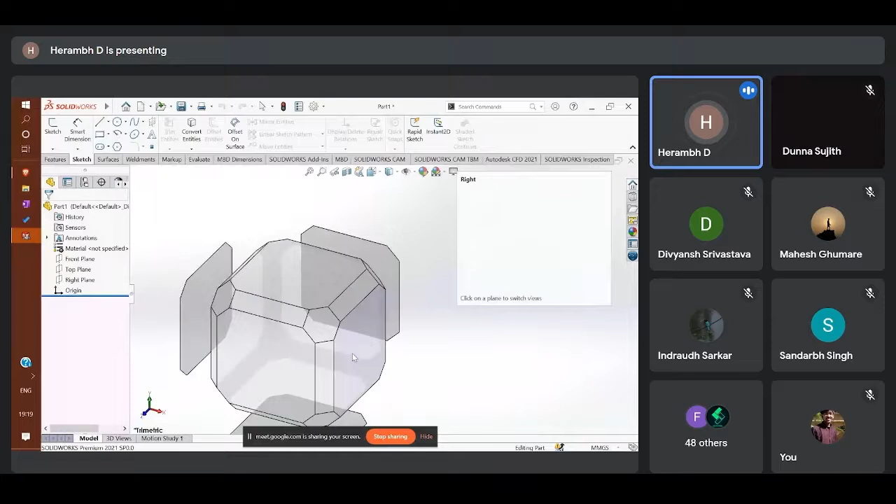So here you can see the various planes and different views, as you've learned in engineering drawing - this is your top view, front view, right view, left view, and so on. On this left side, you have your front plane, top plane, and right plane. You also have your origin, located at the center, which is the intersection point of all three planes.

You also have an option for material - after you make your part, you can specify what particular material it is made of. If you have any annotations to make on the surface or component, you can use this. There are various sensors you can use, and this is your history, which shows the previous parts you had made. So let's start off with the basic tools.

Firstly, when you make any design, let's not talk about CAD, but give more focus to designing and the processes involved. When you're designing, the first thing you do is draw it by hand - you draw it on a 2D plane, imagine it in your head, and draw it on a 2D plane.

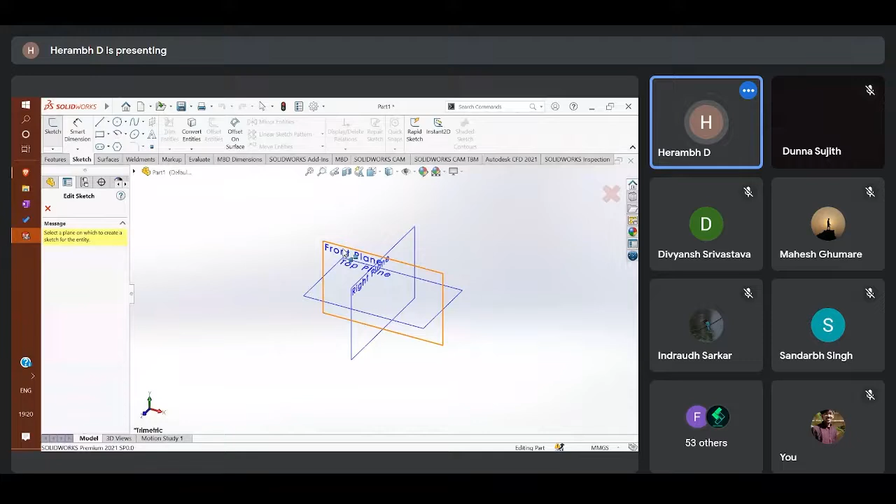So firstly we would do that - we'll select the sketch part and open up a sketch. Here it would prompt you to select the plane on which you want to make your sketch - you have the front plane, the top plane, and the right plane. For now, I'll just click on the top plane, and now you can see it's opened up my sketch. This is the top plane, and anything I make over here would reflect on the top plane.

So here are the basic tools. You have the line tool, similar to what you have in MS Paint and AutoCAD. Using this, you can draw straight lines and then connect them. When you make a closed polygon, make sure it shows a shaded region in the enclosed area.

If this shaded region isn't visible, it means at least one of your sides is open, or there's some mistake. You can also see that here your parameters show up - this is the length of this particular line, highlighted in light blue. I can go ahead and edit that by typing 100, and you can see that automatically reflects over here.

Here are some relations. If I select this particular line as well as this particular line and apply a relation that they are perpendicular, you can see the angle between them becomes perpendicular, and this reflects in the existing relations. There are many other relations you can mix and match between and try on your own.

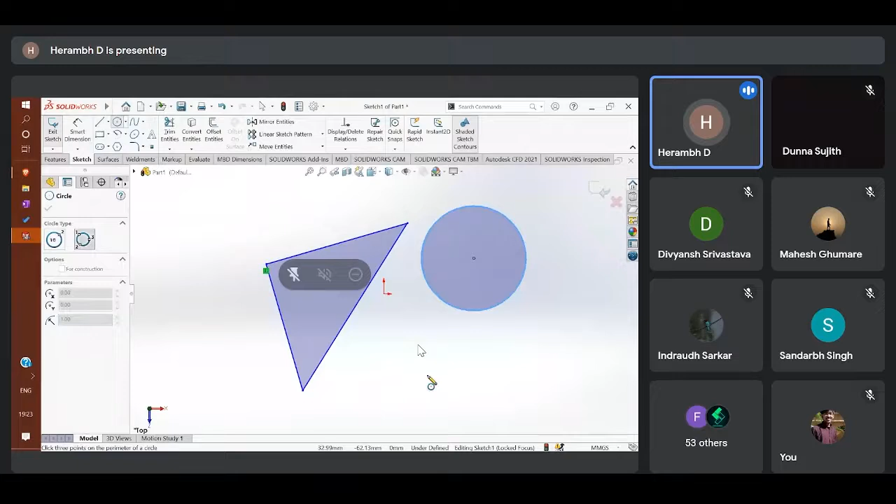Next, we'll move to circle. Circle, as you know, is the same as what you have in Paint. The circle can be drawn using two methods - either you choose the center and then fix the radius, or you can use the 3-point method where you select 3 points, and that forms the basis of your circle.

So is everything okay up to here? Yes, sir. Yes, sir. Yes, sir.

And in case you want to delete this, you can click over here and just slide, drag it, select everyone, and click on delete.

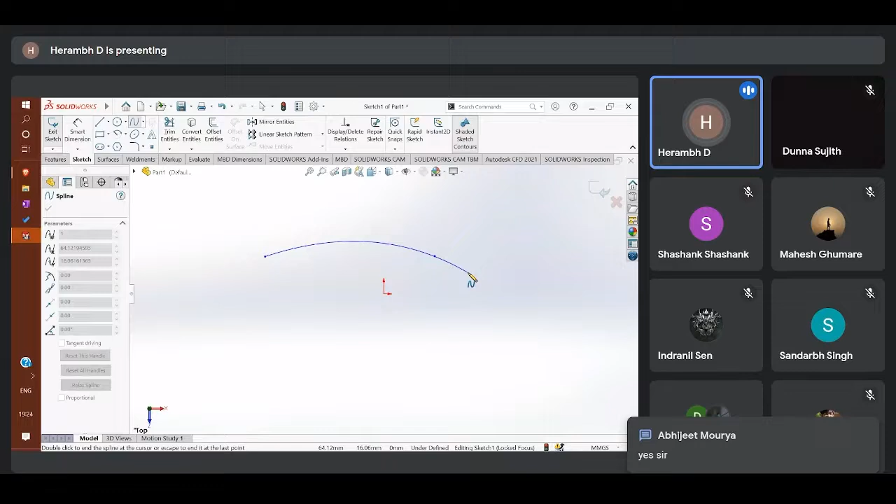Next we have spline. Spline is basically a line tool, but it also allows you to bend the line a bit. You all know that when you design automobiles, you have to consider aerodynamics - curved surfaces in general are more aerodynamically stable compared to hard lines. So this is one application I can think of where we use spline, and there are many other applications, just that I can't remember any other one right now.

Right, so this is the spline. Once you fix this, you can then go ahead and change these to whatever particular shape that you want.

After that, you have the rectangle. Rectangle can be drawn in 5 ways - the first, most simplest way is to select the opposite corners, and that would draw your rectangle. Then you have your arc. While drawing your arc, you have your center and then 2 points - that's the most simple way you can draw an arc. Once you've drawn your arc, you can also go to these parameters and change the various parameters, then choose whichever particular one you want.

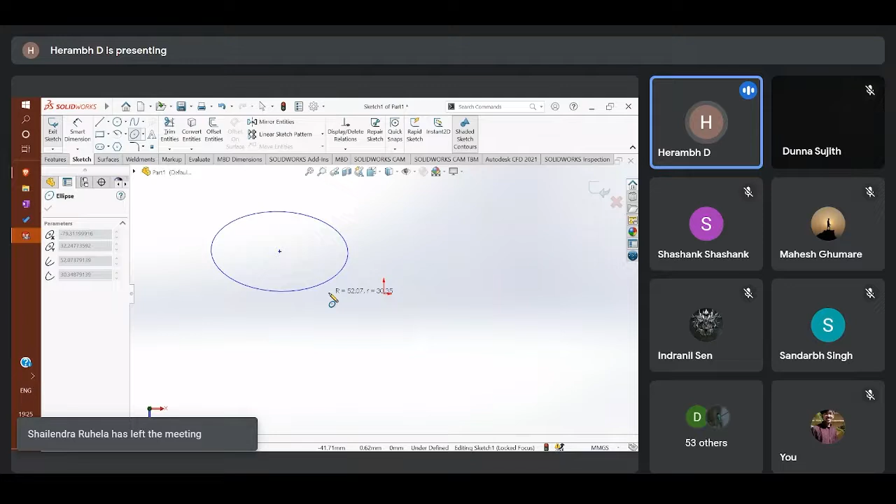Then you have the ellipse. As you know, an ellipse is slightly compressed on one side and elongated on the other. Using this, you can set your longitudinal axis length and then your lateral axis length.

Here you can add any text if required. Here you have a straight slot option, which looks somewhat like this - that's how the straight slot looks. And here you have some other curved slots that you can draw.

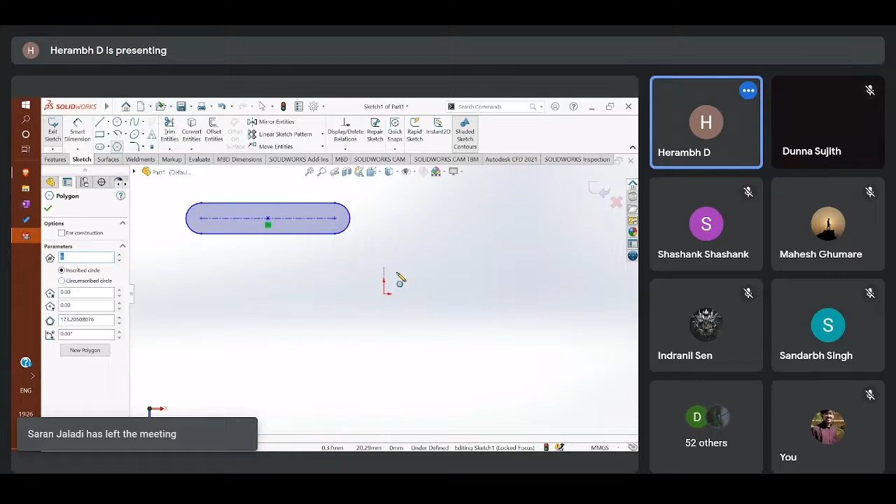Here you have the polygon option. You can select the number of sides that you want, then choose an inscribed circle or a circumscribed circle, and draw the particular polygon that you want.

After that, here's your sketch fillet. So let's say you're drawing a rectangle, and you can notice that the corners here are hard lines - they intersect at 90 degrees. If you don't want a sharp angle and want rounded edges instead, you can go to your fillet, select your corners, and then specify the radius required.

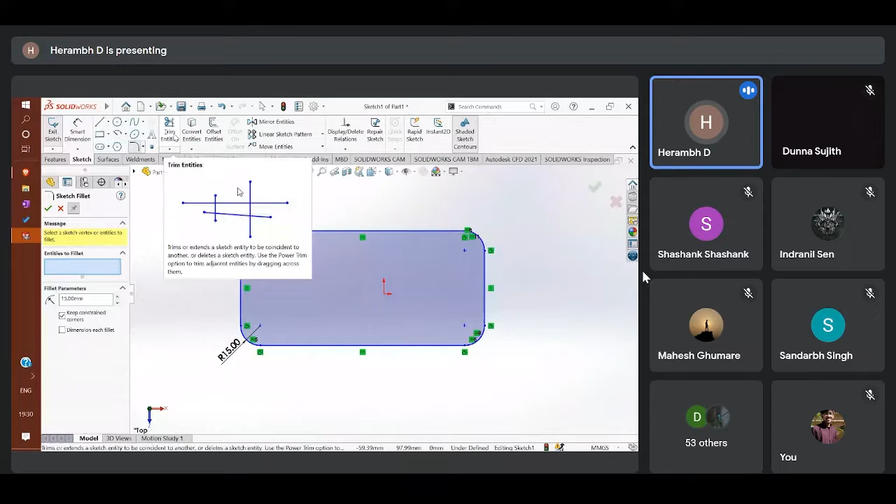Moving on to trim entities, as soon as I click on trim entities, it shows me the power trim option. What the power trim option helps me do is cut between any two given points - I just draw a line passing through that particular object and it removes it. You can see I have two points and this is the line between them, and as soon as I drag my mouse through it, it removes it. That's what the power trim tool does.

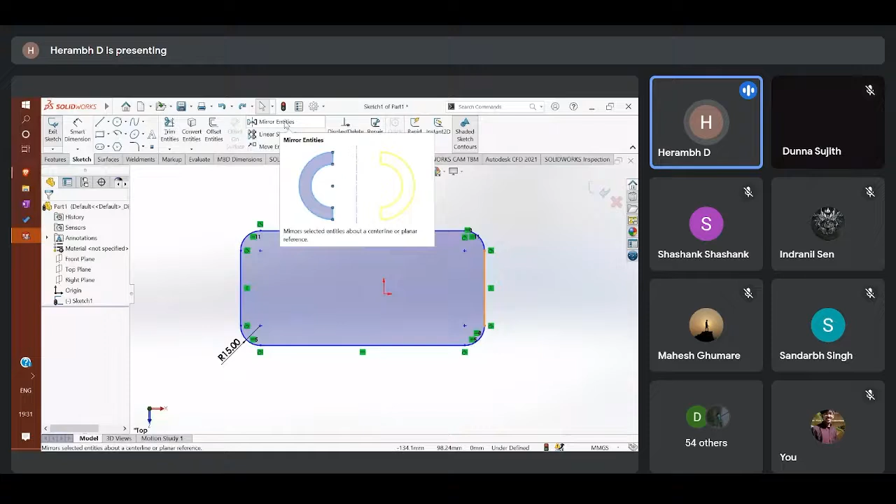You can also offset entities, mirror entities, linear sketch pattern, move entities, and so on. I'll be talking about mirror entities and linear sketch pattern further.

Let's draw a small circle over here to talk about the linear sketch pattern. It makes a linear sketch - a recurring sketch in a linear direction. This is my direction, that is my x-axis, and this is the distance. If I increase that distance, you can see it increases. Say I do 20 millimeter - this is how much my distance would be. And if I increase this to say 10, I would obtain so many circles.

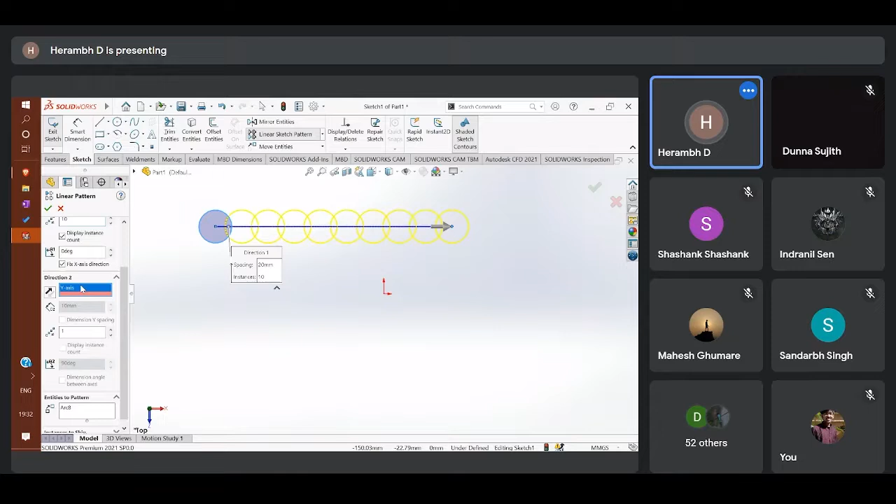Now going to direction 2, this is my y-axis. If I increase this, say to 5, you can see I obtain a matrix of this whole thing. If I make this one instead of 5, you'd see this again becomes a linear pattern. You can play around with this as per your application and make the suitable choice.

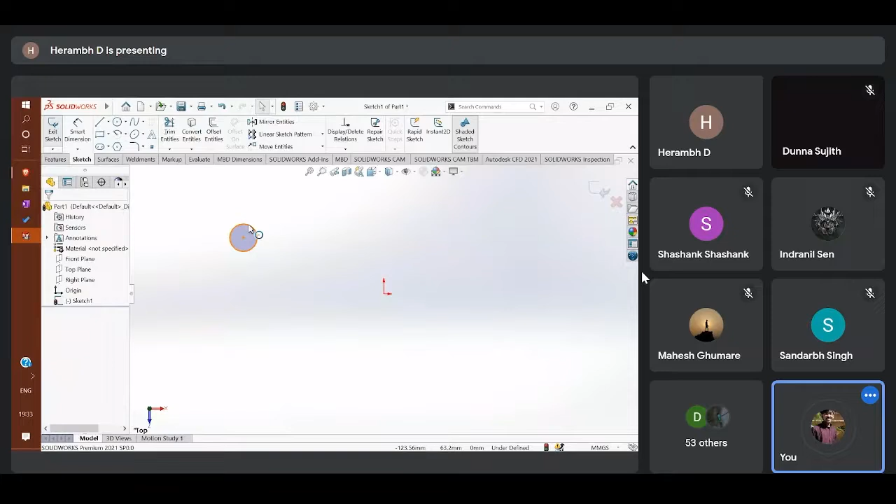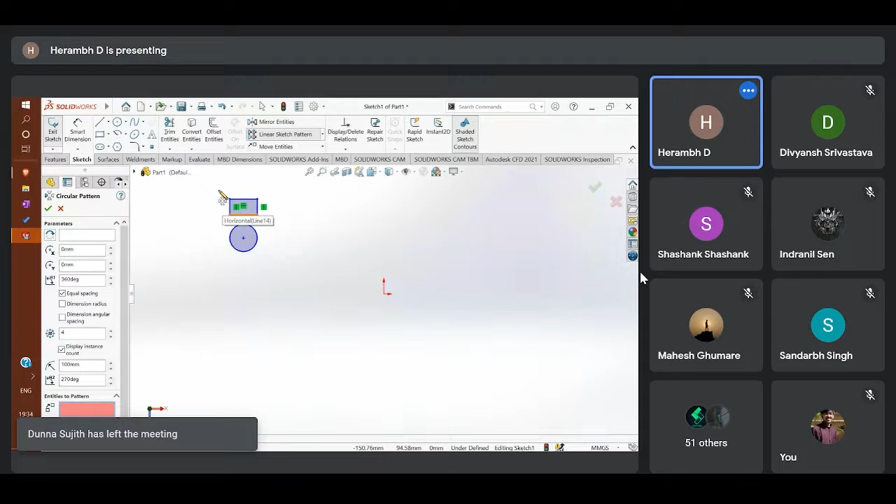When you click on the linear sketch pattern dropdown option, you also have a circular sketch pattern. In your circular sketch pattern, you have something called entities to pattern - the particular object that you want to make a pattern with - and the other object is the circle that you want your pattern to be around.

I go ahead and select my object that I want to be patterned, and this is my point - the point around which I want my pattern. I can increase the radius so that my pattern forms around it, and that's about it. That would result in the formation of a pattern in this manner.

Okay, so say I've made all these entities. Now I want to move this particular rectangle over here, or say over here. This is want to move this rectangle, right?

So I go ahead, click on move entities, and I select this particular one. And you have the parameter from to. So my start point is the center of this. Okay, let's say I move it from this corner, and then I move this, right?

Okay, can anyone tell me why all my rectangles moved? And can anyone also tell me what was the particular feature that you noticed when all these rectangles moved?

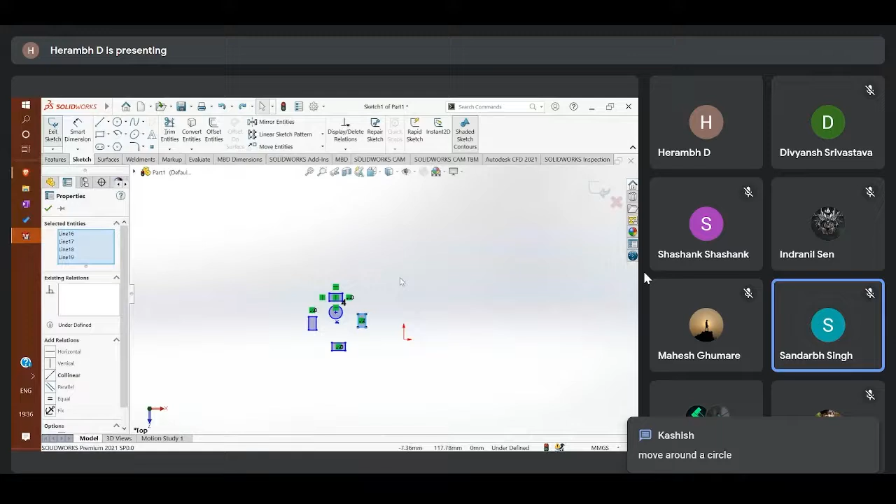So can you please repeat this part? This particular part. Oh yes sir. From where? Like from circular sketch pattern, is it? So how those rectangles moved away from the circle, that part.

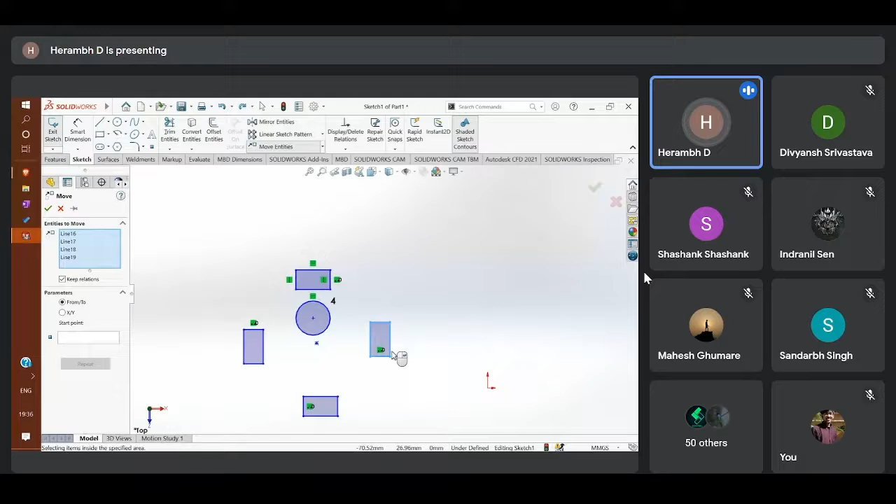Okay, so I click on move entities, right? And then I go ahead and select the particular object that I want to move. After that, you can see that in the parameter section, I have ticked the from and the to. So I then have to specify my start point.

So say I specify this as my start point, and then as I move my cursor, this is the distance by which I want to move this, right? So you can notice that all my rectangles start moving as soon as I move this. So can anyone tell me why this is happening?

Okay. Oh, okay. Okay. Right.

Okay, so in a way this is right, but not completely right. My objective was to move this particular rectangle only, right? This was the only one that I selected. So ideally, what should have happened was that when I move this particular rectangle, only this should have moved. Why did the others move?

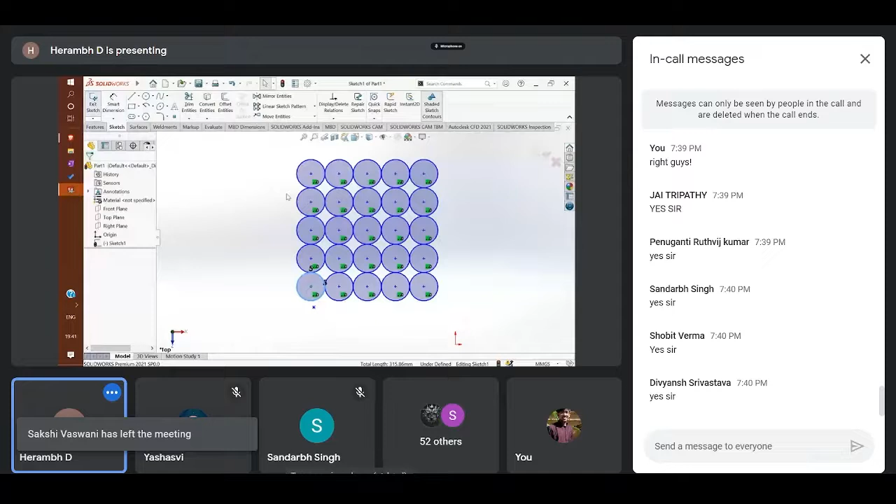Right, so let me go ahead. This is my sketch, okay? And I'll be exiting my sketch now, and I'll be moving to features, okay? So in the features, these are the various types of features that you have.

And for this particular example, I'll show you just a second. Okay, so I'll show you what happens when you use extruded base. Okay, so I'll go ahead and select all my circles.

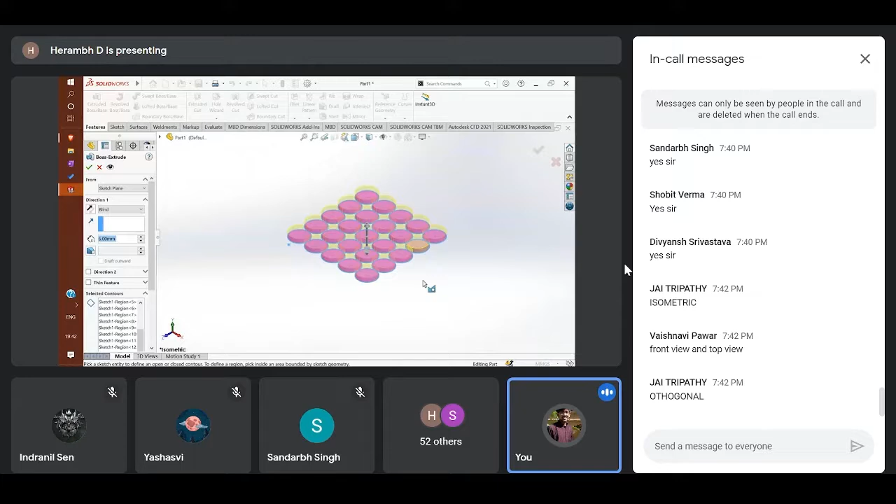Sir, this is the isometric projection. Earlier one was the top view. The earlier was the front view and this is the top view. Yeah, what's the exact?

So you notice that I selected on extruded boss base, right? So let me first tell you what extrude means, so that would help you understand what I'm doing here. So extrude basically means to push a plane from one point to another point in the same direction, right? That's what we're doing here.

So when you extend a surface or a plane in a linear manner, it is known as extrusion. And this extruded boss base is what I mean. It's the same thing, and it helps us achieve the same thing. So let me do that again for you.

I'll go ahead and select all. Just a second. Yeah, so I go ahead, click on my extruded boss base, and I select all these, right?

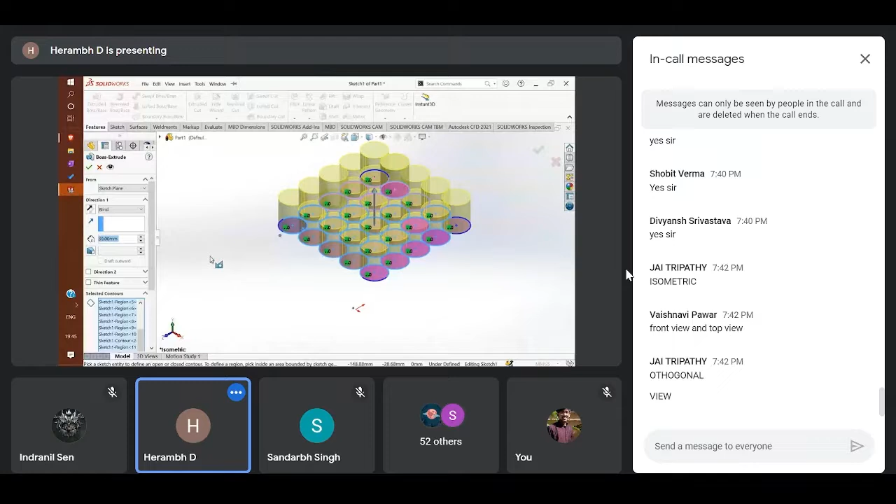As I'm selecting these circles, there's a predefined value of this length that's specified that causes this extension, and it gives us a preview. This yellow thing you can see here is the preview of how it would look if we did continue with the extruded boss base. So the one over here is the direction, and over here you can toggle with the length and stuff. Let's keep it at 30, and just like that, 25 cells of my battery pack have been made.

You can also see that it's a very simple process. It didn't take me anything, it was very effortless. I didn't have to measure each single one and then place them separately. So this is why this is the strength of SolidWorks, and this is why we chose, and many other companies at the international level choose SolidWorks over other software.

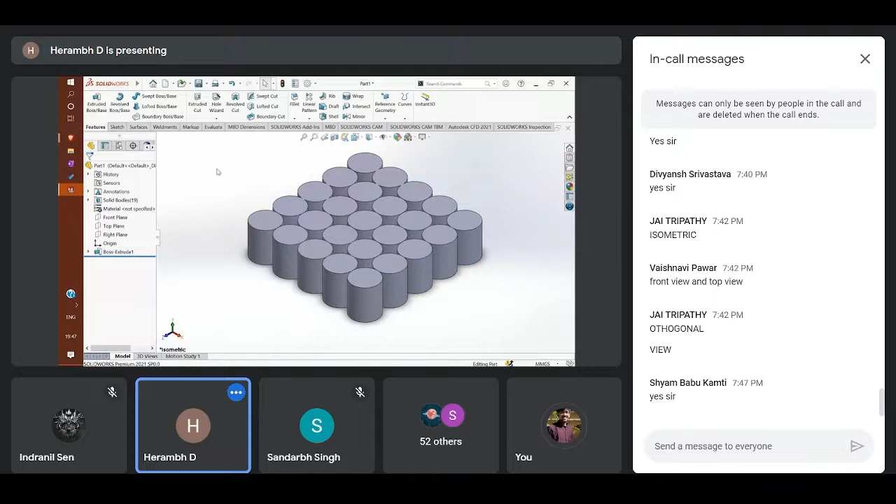Unmute and let me know if you got it, because I can't look at the chat right now. A toroid, yeah, a toroid, right? So that would be...

Okay, repeat - what I was saying is I have this circle, and let me take the top view. Now I have various circles. Let's say I'm just selecting this particular circle, and I draw an axis passing perpendicular to it, along the y direction or the x direction in this case. I draw an axis in this direction, and this circle is located in the zx plane in this case.

Now I want to rotate this circle in the y direction, such that it comes out of the plane and along this axis. That would result in the formation of a toroid, or a somewhat donut kind of shape. Do you all agree? Yes, sir, yes, sir. Okay.

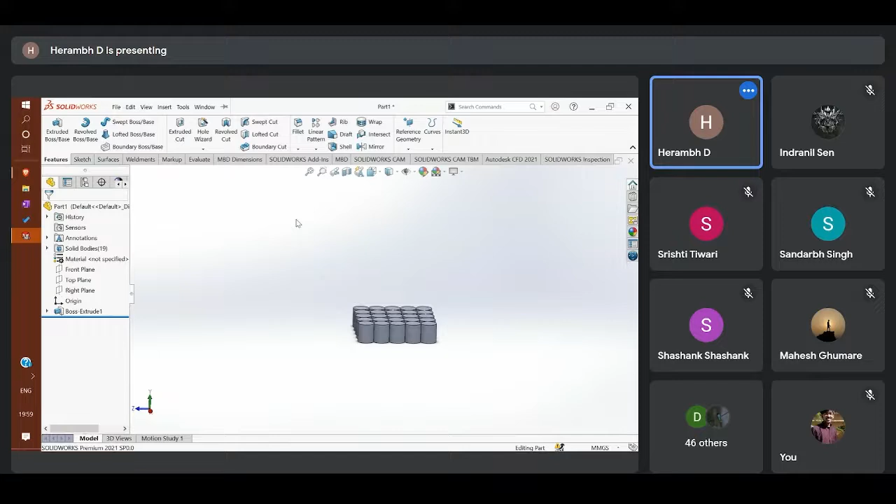Right. Dhruv, can I start? Okay.

So moving on, these were all the ways you could extend a 2D surface. The boss or base were methods you use to add material, right? So now what do you use to remove material? When you want to remove material, you use the extruded cut, the revolved cut, the swept cut, lofted cut, boundary cut, and so on. I'll be using this when I make the part, so I'll skip past this for now.

Next, you also have the fillet, similar to how we had in the 2D. Right? We have the fillet. So let's try the fillet on one of our parts. Let me just figure out this thing.

So I'll go ahead and click on fillet, and then it would ask me for which particular item I want to fillet, and I'll go ahead and select the edge. Make sure you select the edge when you're filleting, not the surface, because that wouldn't be filleted there. And then I'll go ahead and increase my radius, and then click. So this is how it would look if I fillet it. Say this was a rectangular shape or some other shape, only one of the sides would have been filleted. Since this was circular, the whole thing got filleted.

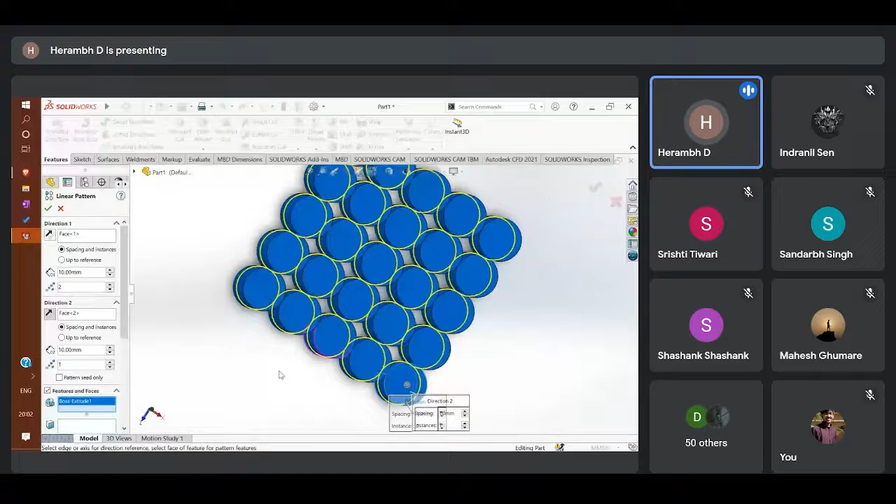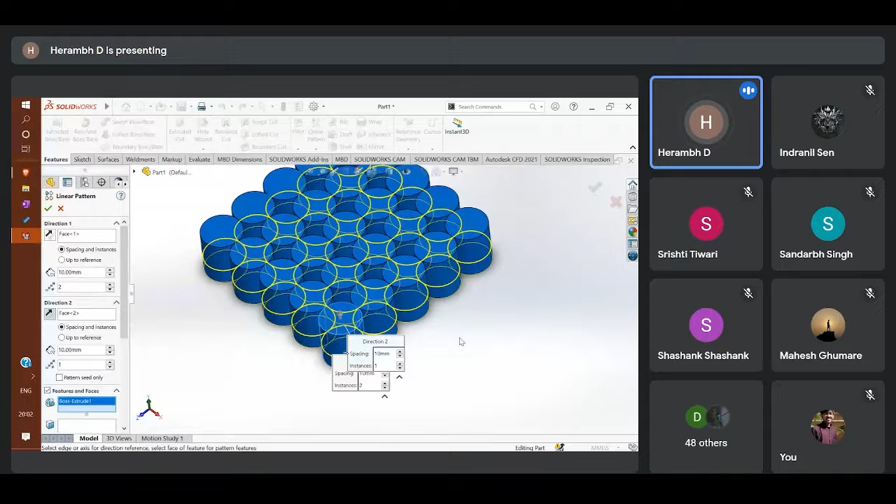Now you can also see that I have the linear pattern. Let's see what happens when I use the linear pattern. Let me select this, I'll select the whole body. So you can see that as soon as I selected this and specified the distances, it resulted in the same thing as what happened when I used the linear pattern in the 2D case. But the benefit of this is that instead of me having to select each individual 2D part and then applying the extruded boss base, in this I would only have to draw one single cylinder, and then this would help me draw the 3D automatically.

So yeah, these are the various things you can do in features. The other parts you can observe, like the draft, is something you can use to taper a particular surface area. Using shell, you select only one particular surface and then shell out the rest of the volume. You also have various other parts. These aren't used that often, but you can explore them. They're always handy, that is why they present such tools.

So let me move on to reference geometry. Reference geometry basically provides me with all these options. I'm about to go ahead and select plane. As soon as I selected my plane, it's asking me for my first reference. So in my first reference, I have to select a particular plane which I want to keep as my reference.

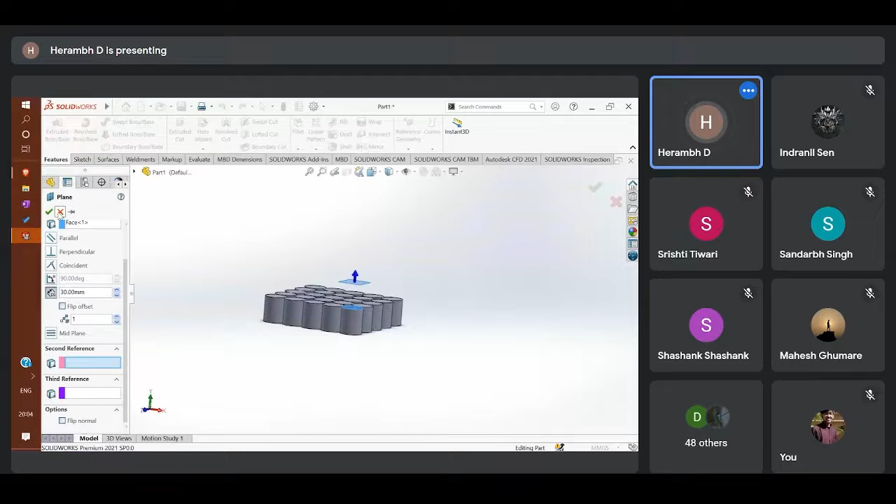And if I hit enter, you can see that a new plane, Plane 1, has been created. This is visible over here as well as over here. You can see that I have a new plane one.

So let me tell you briefly how I can use this new plane to create a totally separate sketch on this plane. Let me take the top view. So when I'm looking from the top view, if I make any changes over here, doesn't it look like my changes are going to reflect on the same plane that we made these circles on?

Can anyone unmute the mic and answer?

Yes sir, it does look like if I make some changes on this plane one, it's going to reflect in the same plane as we made the circle, right? Yes sir. Okay, so I'll show you that that doesn't happen, and this is why we use this reference geometry and this plane. This might not be very helpful in this particular case, but in most other cases it proves to be very handy.

So I'm going to go ahead to sketch, same procedure as what we did in the beginning. Go ahead to sketch, click on sketch. It will ask me to select my plane, but since I already had my plane selected, it didn't ask me. And now I can draw anything I want.

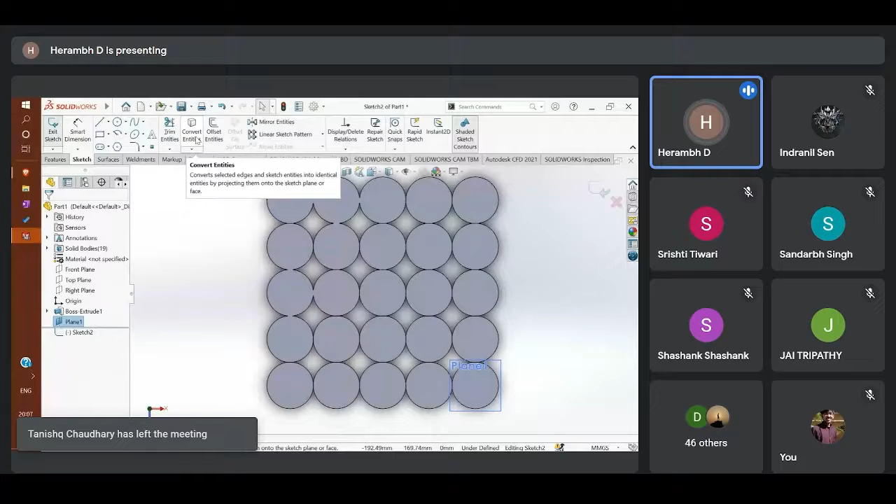So that's what's happening here. I already have my sketch made on the top plane, and now I'm trying to import that sketch, or project that same sketch with the same dimensions and stuff, onto my new plane, which is identical to that plane.

So I'm going to go ahead and click on convert entities, and then I'll click on this circle that I've made. Okay, and then I'll go ahead and click on enter.

So you can see that this arc has been made. When I only selected this particular arc, you can see that now this particular arc has been drawn onto my new plane.

From the top view, it looked as if it was being drawn on the same top plane, but when you look at it from, say, an isometric view or another view, you can see that this new sketch, which has been made using convert entities, has been made onto a new plane.

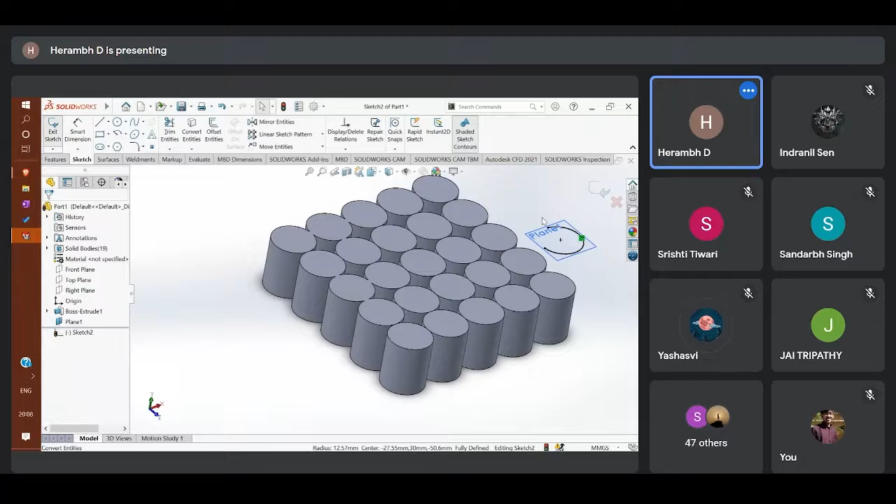Any doubts in this? No sir. Okay, so yeah, this was how convert entities works.

So using reference geometry, I drew my plane. I selected and drew my new plane, and then I went to sketch and sketched on this new plane. And using convert entities, if we want to draw a similar or identical sketch from one plane to another, we want to import the same shape so that we don't mess up with the measurements and stuff. So it comes in very handy.

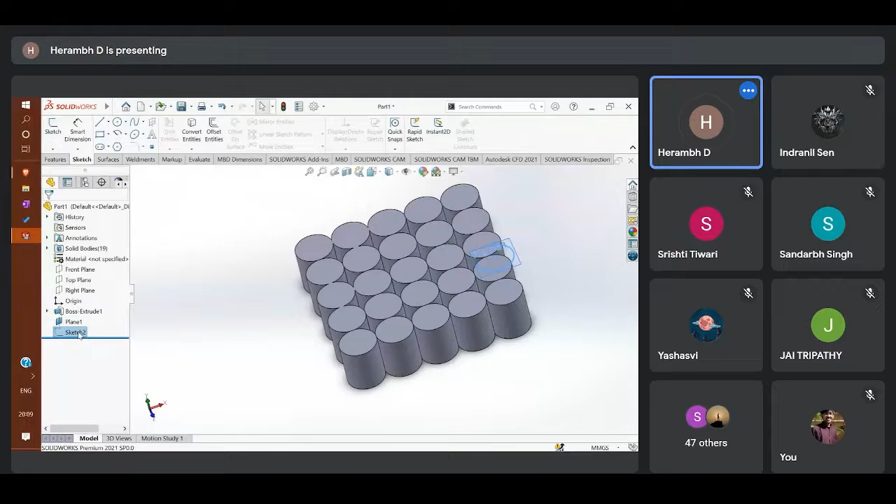So let me exit this sketch, and let me delete this particular sketch and also this particular extrude. Let me start off with a new sketch.

Let me make it on the same top plane. So I'm making a square, sorry, a rectangle. I want to set the dimensions.

So I go ahead to Smart Dimension, click on the line that I want to find out the dimension, and then I set this to 100. Click on this, set this to 200. So now you can see that I've made my rectangle 100 by 200.

I now want to fillet my corners. So these are my corners. This particular fillet radius is very high, so I'll bring it down to 10.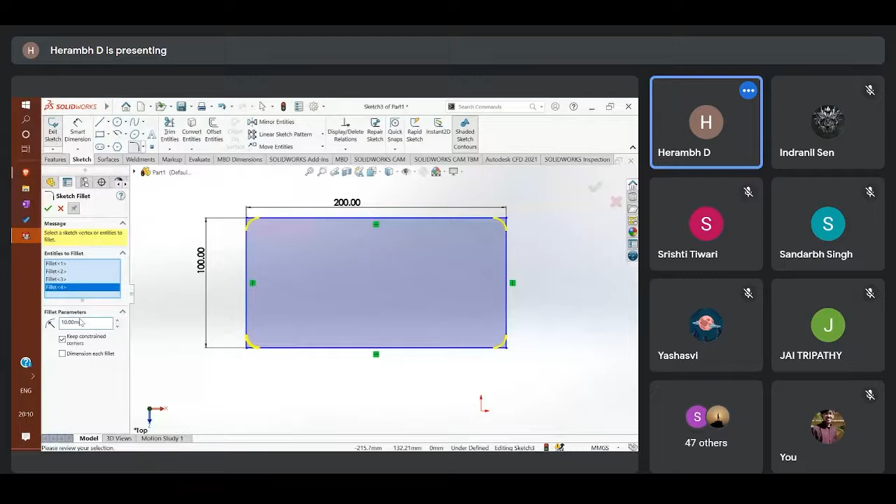So now my filleted rectangle has been made. Now what I want to do is extrude this. I move to feature, exit the sketch, move ahead to boss base, and make it 30 millimeter.

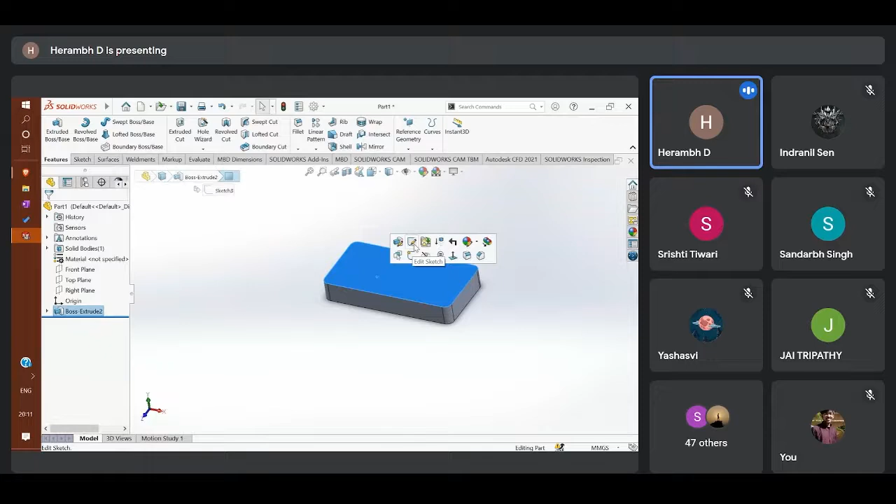This looks somewhat like my mobile phone, right? Okay, so what I'm going to do now is make a sketch on this top surface of this extruded object. I'll select this plane and say that this is the plane on which I want to make my sketch. So I'll go ahead and make a circle here.

I'll make this 20 millimeter in radius. Now I want to bring this to the center. There are many ways you can do this, but I find one particular way very helpful, and that's using smart dimensions. So I'll select on the circle center, and then I also select.

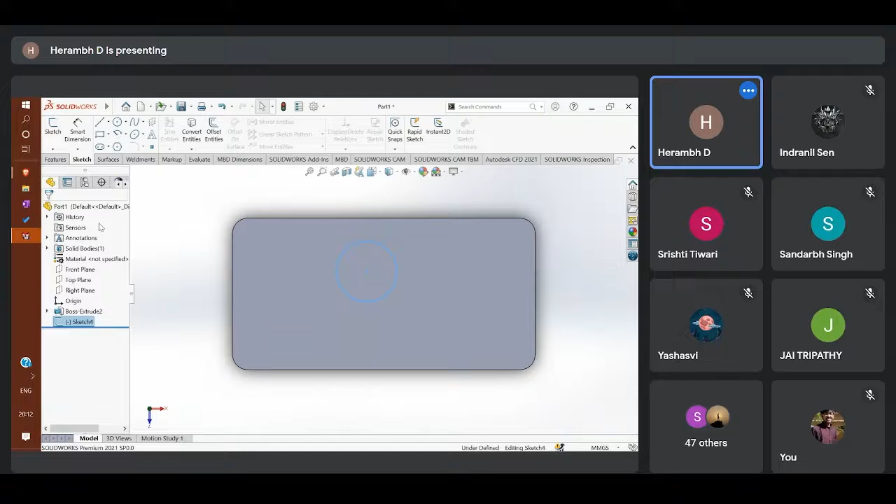I'll use the smart dimensions. Just a second. So now I select on the smart dimension, and I select this line, and I select this particular point.

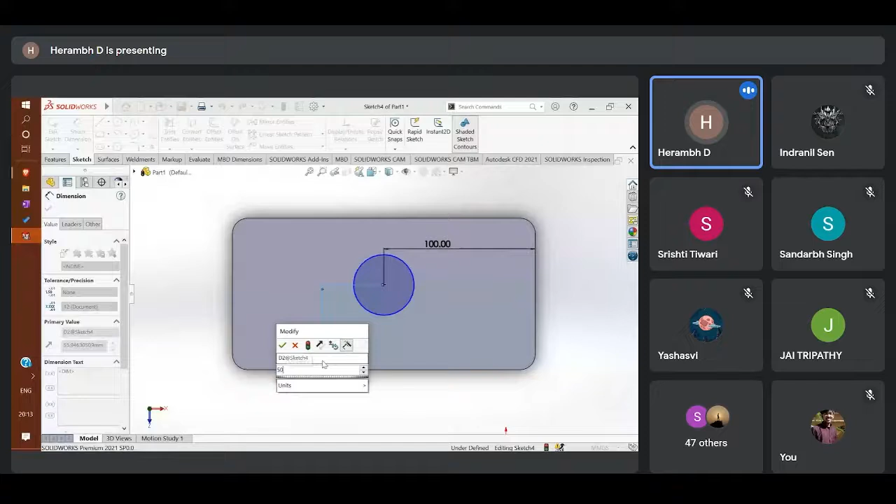So I went to smart dimension, and I found the distance between the center and the line, and I entered this as 100. Now I also find the distance between this point and this point over here - this point, the center, and this particular point - and I want this to be 50, so it's exactly at my center.

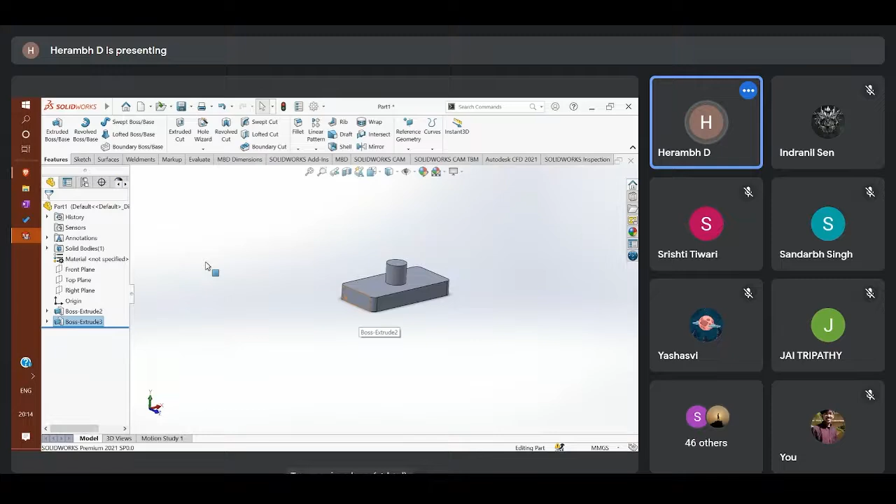After having done this, I move to features, extruded boss base, and enter my distance, say 40 millimeter. So like I taught you how we made a normal extrusion, and then on top of that extrusion, on a new plane, we made another sketch and extruded that as well. Now I'll show you how we use the mirror tool.

So to use the mirror tool, let me first make two circles. Here's one of my circles, this is say 10 millimeter in radius. Now I want to draw another circle over here, which is at the same distance from the center and from the edges as this one. If I was to measure all this and then do it, it would become a very hectic task.

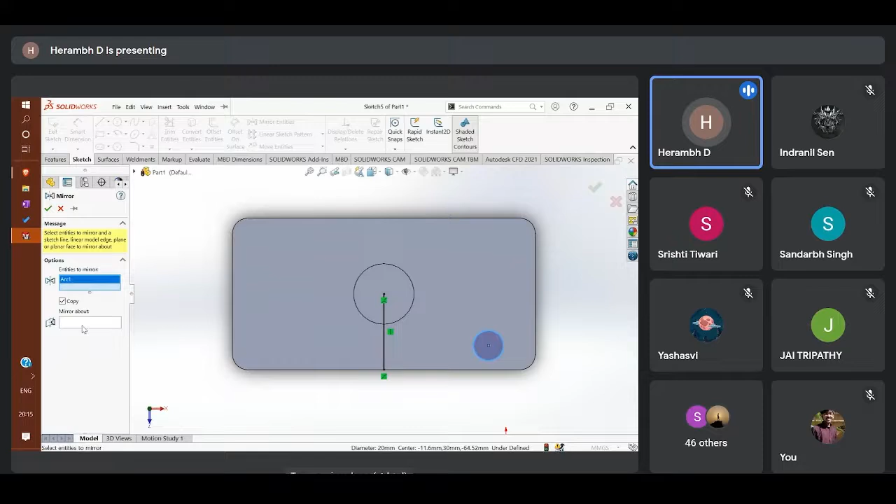So what I'm going to do is just draw the center line of this particular rectangle - this is just for reference. Now I'm going to click on mirror entities, and click on the entity that I want to mirror. Then it also asks me for the mirror about, which is the axis about which I want to mirror my object, so I select that as well.

As soon as I select that, it gives me a prompt and shows me a preview of how my mirroring would look. You can see it's exactly the mirror image of what I had made. I'll go ahead and click enter so my new object is created.

So there are two kinds of mirror entities. One mirror entities occurs in the 2D sketch, and the other occurs in the features. The difference is that when you're mirroring in a 2D sketch, the mirroring occurs with a straight line or some axis as reference, and when you're using mirror entities in a 3D interface, you use a plane as your reference geometry.

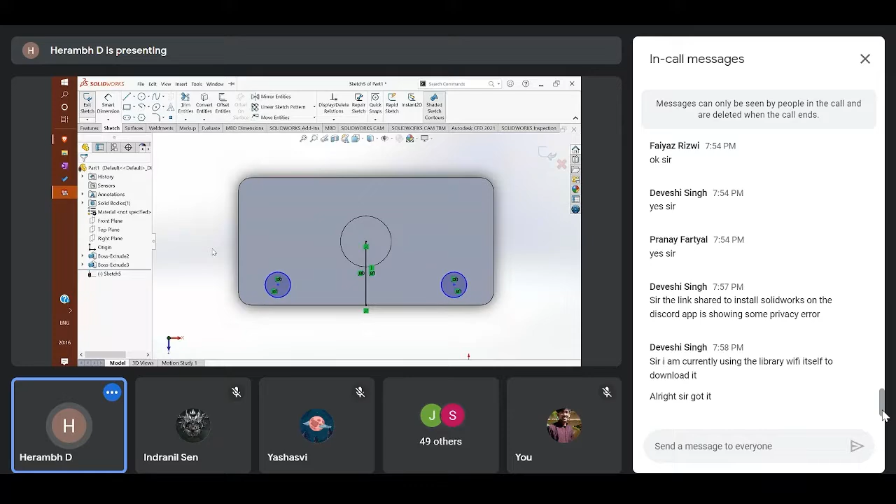So now that my circles have been drawn, I'm going to go to features, click on extruded cut, and select the objects that I want to extrude. So I've selected the two regions. Now instead of blind, I'm going to select through all.

As soon as I click on through all, you can see it cuts through the whole material that had been added. If I clicked on blind, I could adjust the value through which it would cut, but I'm going to click on through all because that's what I want for this particular application. As you can see, when I clicked on through all, the region where I was prompted to enter my distance went away, because that's already predetermined.

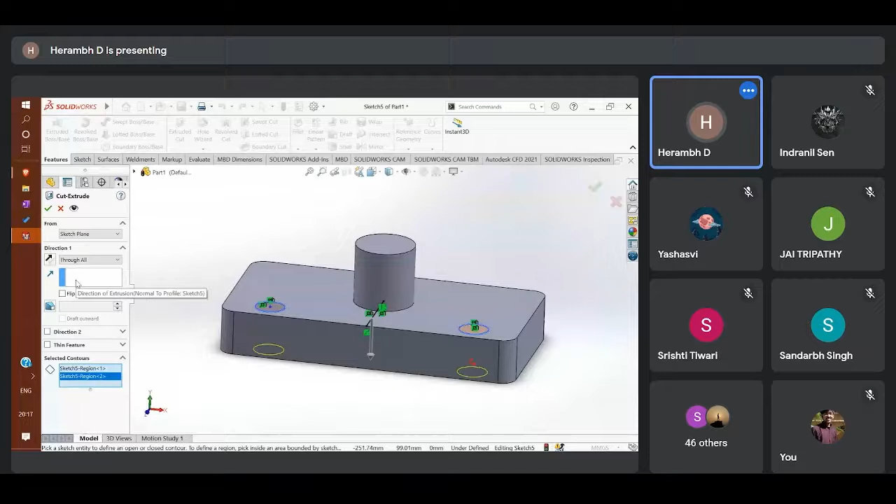So now when I do this, you can see my hole has been made - two holes, and they're exactly identical with respect to the center line. So does anyone have any questions up to here?

Anyone? Can you tell me using your mic? No, sir.

So everything understood, is it? Is there anything in particular that you want me to explain again, or is everything okay?

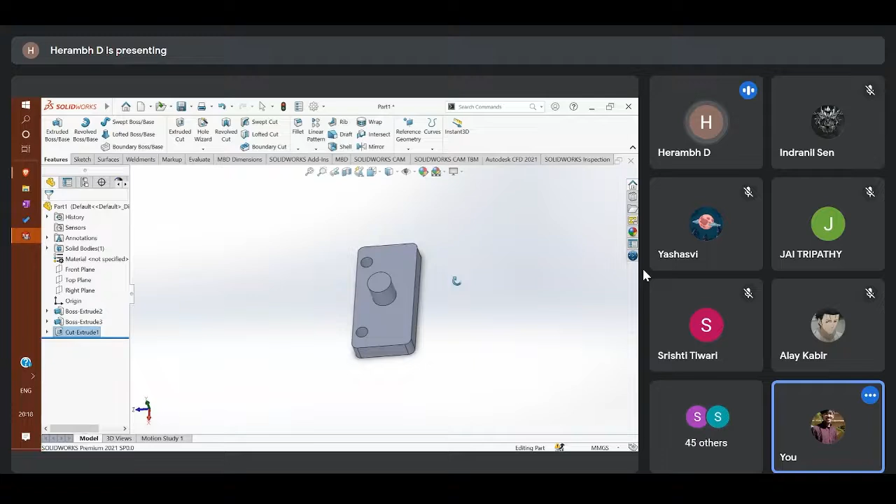One question - can anyone tell me what I could have used? What would have been different if I used blind instead of through all, and did this? What happened? Any guesses?

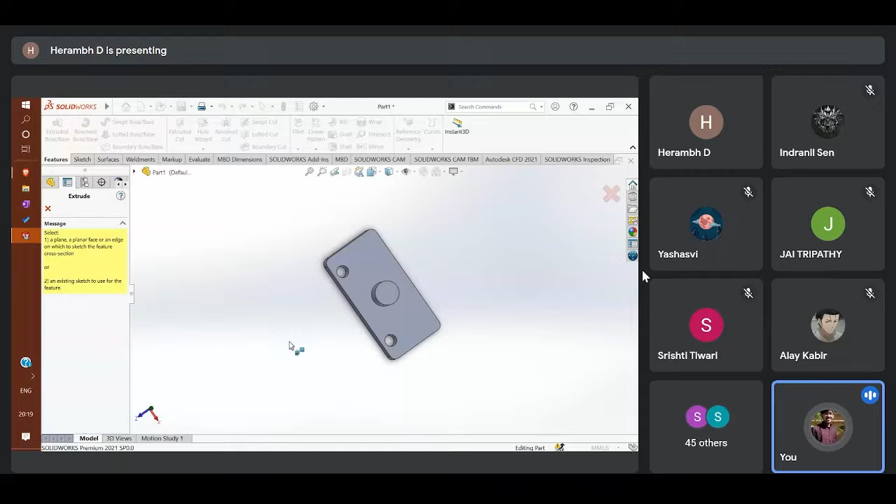Same shape, just like a plastic body, transparent plastic body. And when would this happen? What are you trying - when I use blind instead of through all, you're saying it would look like a plastic body? By blind you mean color, no? Like nothing. Let me redo that once.

I was asking that instead of using through all, if I used blind, what would happen? So maybe that portion would be hollow. It will be covered by both sides, but it will be hollow from the part that you had the distance in mind. Right, yes sir, exactly.

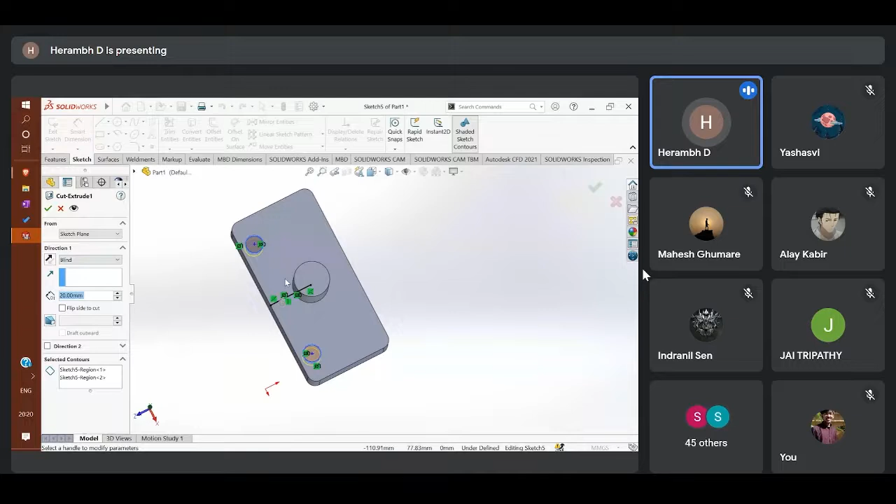So what happens when I use blind is that I can set the offset distance. You can see that from this view. Let me show you in a proper way. It's asking me for the distance by which I want to do my cut - that wasn't possible with through all. What happens in through all is that the hole would extend through all the material present, but that's not the case with blind.

There's another interesting feature you can use - I can use the draft, and then set the degree by which this is to be made. So draft outward, and then I can increase this, right? So what would happen in this case?

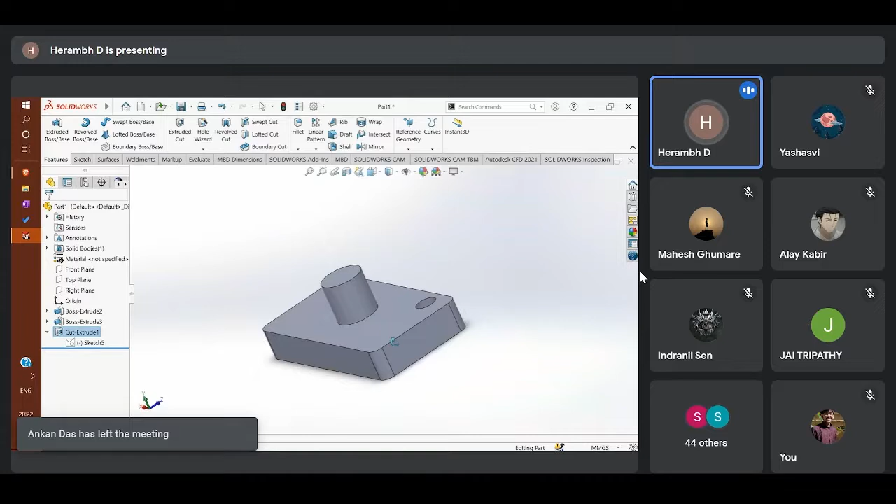A frustum-like structure will be formed. Right, absolutely correct. So this distance - yeah, this is exactly how it would look. You would have a different cross section on the bottom and a different cross section on the top. So this is what happens when I use the draft. Okay.

Okay, let's undo that. So this is my first part. I'll go ahead and save that as part one. I'll now open up a new part.

So I'll quickly go ahead to sketch, select the top plane. I'll make a cylinder. Does anyone remember what the dimensions of that cut was? Can anyone tell me?

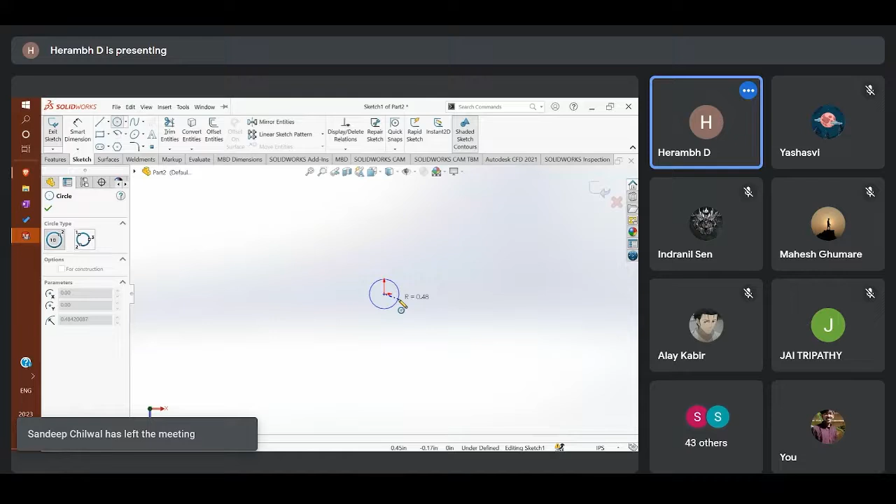Okay, so I had used a 10 millimeter radius for that cut, and as you can see here, this is only 0.5 - it's saying that my radius is only 0.5, but still you can see that it looks almost the same as the circle that I had drawn previously, right? So why is this happening?

You can see that at the bottom over here, there is an option where you can edit your units. So this currently is being drawn in inches, pound, and second, and I had drawn the previous one in millimeter, gram, and second. Right, so this is what made that difference.

This can prove to be very fatal because once you make one particular drawing in a particular set of dimensions, and then you try to make another part in another set of dimensions, you may not be able to make the assembly of those parts together. So be cautious about this - as soon as you start your sketch, make sure you are starting off with say millimeter, gram, second, or meter or inch as per your requirement, and then you make your sketch.

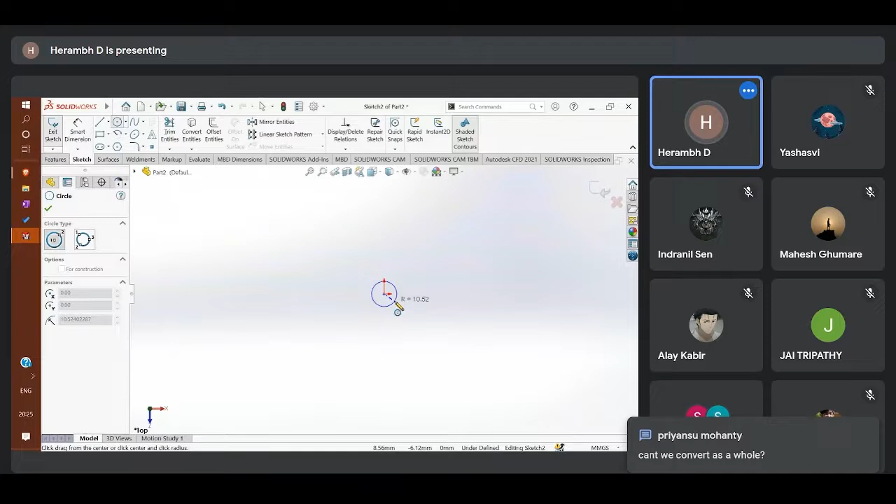So I'll go ahead to sketch, click on my top plane, select my circle, and make it 10 millimeter. That's my circle. I'll move ahead to features, extruded boss base, and give it a height of 60 millimeter, right? So here's my cylinder.

I'll use this cylinder to insert this in the holes we had created in that part. So I'll save this part as well - I'll save this as part 2.

I'll then open up an assembly. So this is a new assembly, and here I already have my part 1 and part 2 opened up for me. I'll go ahead and insert them. I didn't select part 2, so I'll have to import these into my assembly, inserting these components into it.

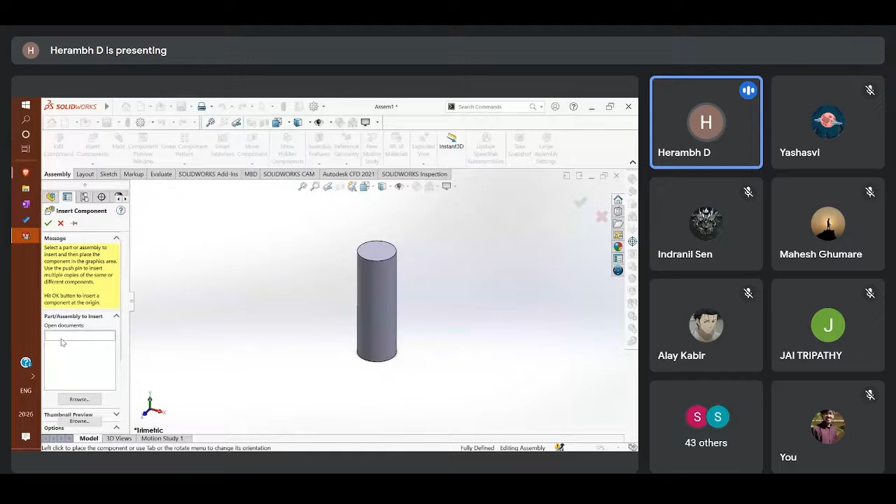So I'll go ahead, click on insert components, click on part 1, and then place this over here. I also want another part 2 for me to insert in this cut. So go again to insert components, which is located in assembly, click on part 2, and then I'll place this as well. Okay.

So when I opened up my assembly page, it's slightly different from what was in the part page. In your assembly page, you would have an option to edit your components, insert your components, mate your components, create a linear component pattern, smart fasteners, and move component. You also have layout, sketch, markup, and so on, similar to before. So when creating an assembly using certain parts, can anyone tell me what methods we use, or what we try to do when we create an assembly, and how is it different from individual parts?

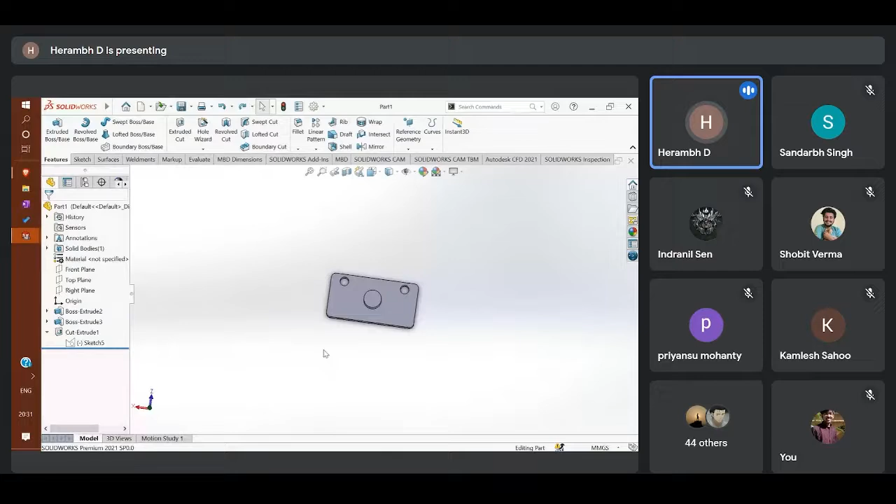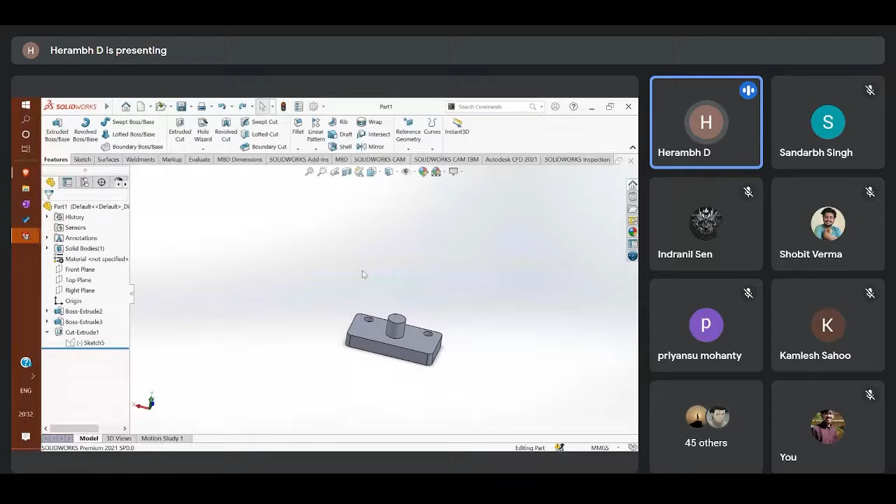It cannot move unless you apply an external force on it, and because it's non-ideal, it does have some specific strain that occurs, so it does bend. In order to avoid that, what we do is use an assembly because we want movement. We want parts to move relative to each other, and that relative motion would help us achieve our overall target. Say in case of a robot, let's say my chassis and my wheels are separate parts. So I want my chassis to move, and my wheels would help me achieve that. So me adding the wheels externally as separate parts onto the chassis would help me achieve that, and that would help me also achieve motion of the robot.

So the same thing happens in this case. I'll show you how you make an assembly using various parts. Just a second.

Okay, so now you can see that I have two cylinders which I want to insert in these holes, and I also want these cylinders to be able to move. Once I fit them in, I would expect them to be able to move within this. So what I do is I go ahead to mates. So mate, what is mate? Can anyone tell me what mate is, in the literal sense, what does mate mean?

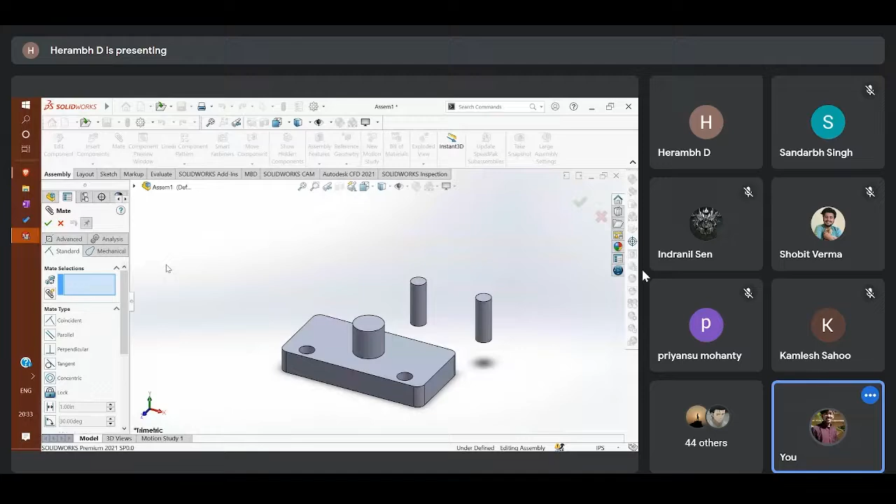So two things meeting together, like maybe touching something like that. Yeah, you're right. Mate is basically two surfaces or two interfaces coming into contact, and depending on the nature of that mate, that would define the way the two surfaces interact and the way they move relative to each other.

So what I'll do is I'll go ahead and select the surfaces that I want to mate. I'll first go ahead and select. Pay careful attention to the particular surface that I'm selecting. I'm not selecting the edge or this surface, I'm just selecting this extruded part, that is the surface area. So I went ahead and selected that, and then I would also select this, and you can see that it automatically moves my part into this specific hole.

Now I have the following options. I could have it tangential, I could have it concentric. In this case, the above three aren't applicable. I can only have this and this concentric to each other. I have an option to lock my rotation, which would mean the rotation would be locked, but it can move axially along this direction.

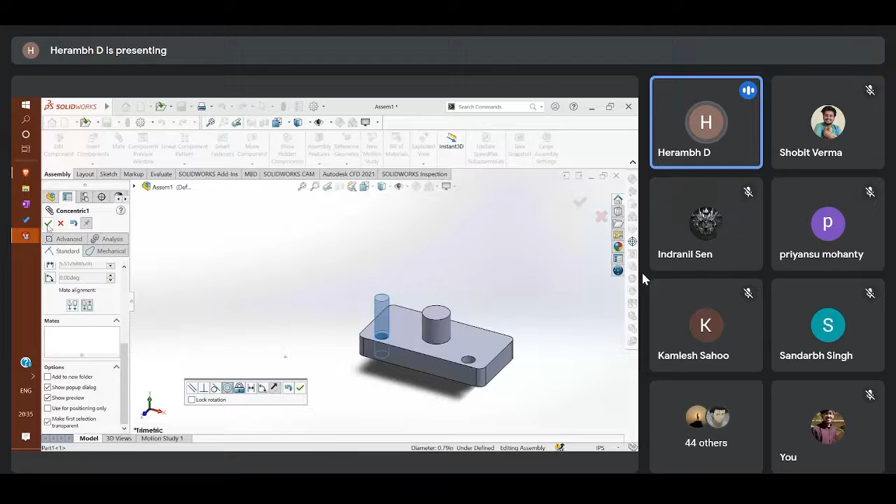And yeah, that's about it. I'll go ahead and click OK. So this is what I end up with. I'll show you a top view of how it looks. You can see that it's fit in perfectly into the cut that we had made, and now we can see that I can move this axially as well.

One mistake I made is that I clicked the whole body, so what happened is that they aren't intersecting right now. So let's go ahead and fix this. I think this would allow me.

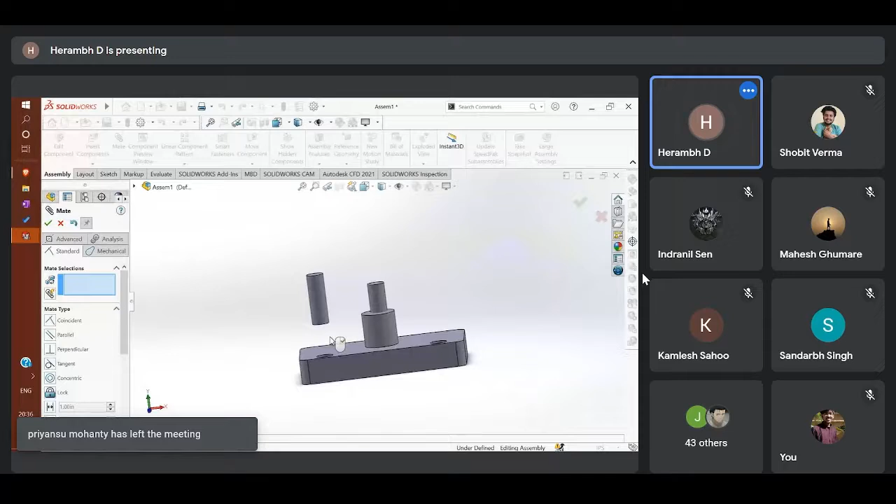Right. So what happened was that this was my fixed body and this was my free body. Now I'm free to move this anywhere along this, and you can see that this movement is only restricted to move along the axis of this cylinder. Outside of that axis, it's not allowed to move anywhere. So this is what my mate has helped me achieve.

Right now, I'll try to achieve this with this specific cylinder as well. I'll go to mate, select my cross-sectional area, then select the inner cross-sectional area, and then select the same thing.

Right. So that again helps me achieve the same thing. Now you can see that since these two are independent of each other, this also helps me achieve some kind of rotation. You'll notice that as I move the cylinder, it would always make sure that this is maintained, and if I were to rotate this, it is still maintained on this side. So this is how a basic mate looks like.

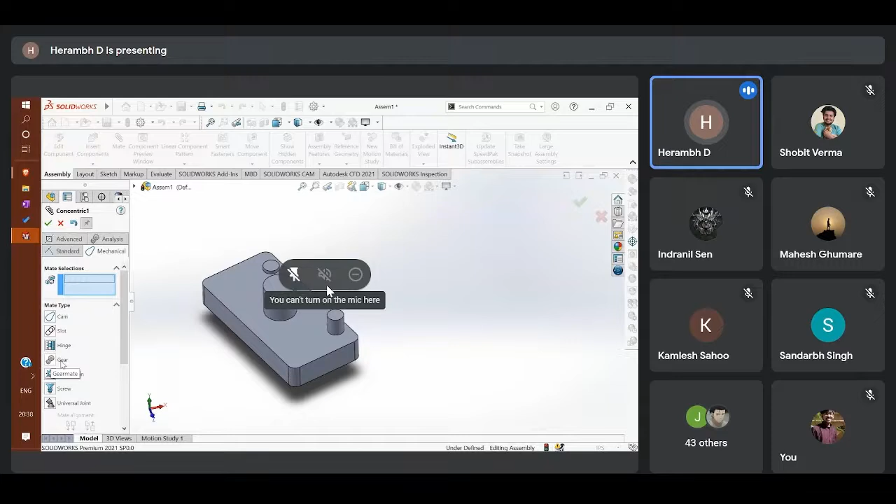There are many advanced mates that are present. There's a mechanical mate where you have a cam and a follower, where you can have a slot, a hinge, a gear, and how they would interact. So if I had a gear, I would create a mesh between the teeth surfaces, so that proper gear meshing would occur, and as I move one gear, the other gear would also correspondingly rotate.

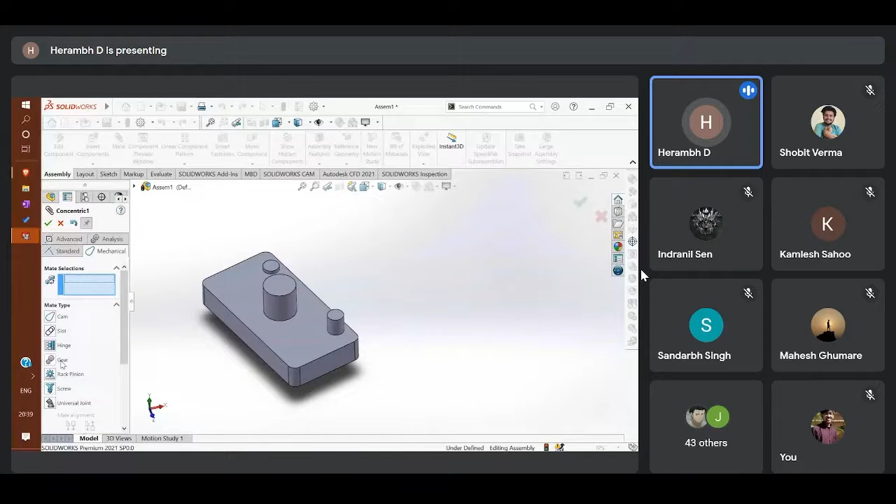So this is the overall idea of how we use mesh and how we use mate and how we use assembly. This is the reason why we have used an assembly and not a single part where I added these two cylinders into these holes, because I want to achieve some kind of movement using these. That was the whole objective.

Okay, one more thing. I'll just move to parts and show you. So I have my cylinder right here. So can anyone tell me a particular material that I should make the cylinder out of?

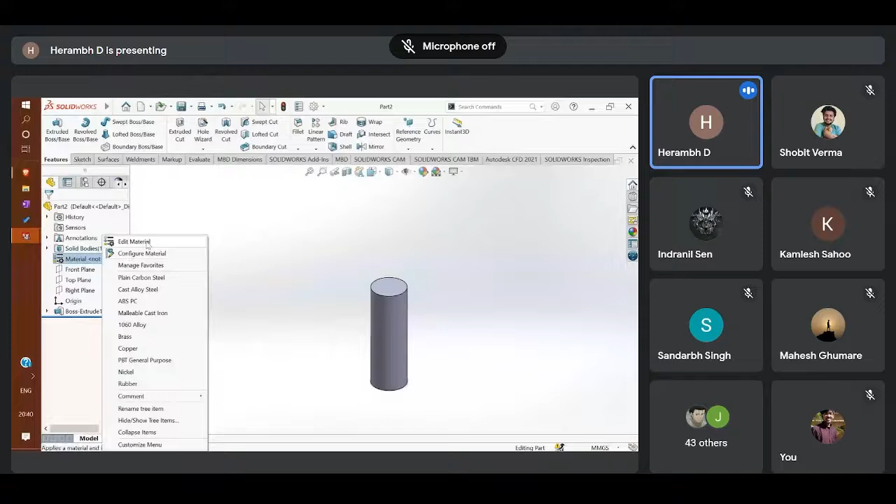So iron or aluminium. Iron is it? Yeah, so in order to select the material of my part, you can see this option over here, and it says that I'm yet to specify the material that I'm using. So I'll go ahead, click on that, edit material, and it gives me a whole database of materials available. What was the material that you told me? Iron, is it? Yes, sir.

So here I have iron, ductile iron, and its variations: gray cast iron, malleable cast iron. I'll go ahead and click on gray cast iron. It will show me the properties of this material, and material selection is a very important step when it comes to design. It affects the overall performance of your design, because if your design is made of a very flexible material, you won't be able to achieve the strength that is required. So I'll go ahead and apply this.

So I have applied this, and you can also see that it's changed my color. Since gray cast iron has a dark charcoal black color, you can see that the cylinder I've made is also of that color and that material.

Now you can see that when I click on evaluate, I'll go to evaluate, click on mass properties, and now since I have specified the material, it will show me different metrics. It will show me the density. So the density of cast iron is 0.01 gram per cubic millimeter, mass of 135.72 grams, and volume of 18849.56 cubic millimeter.

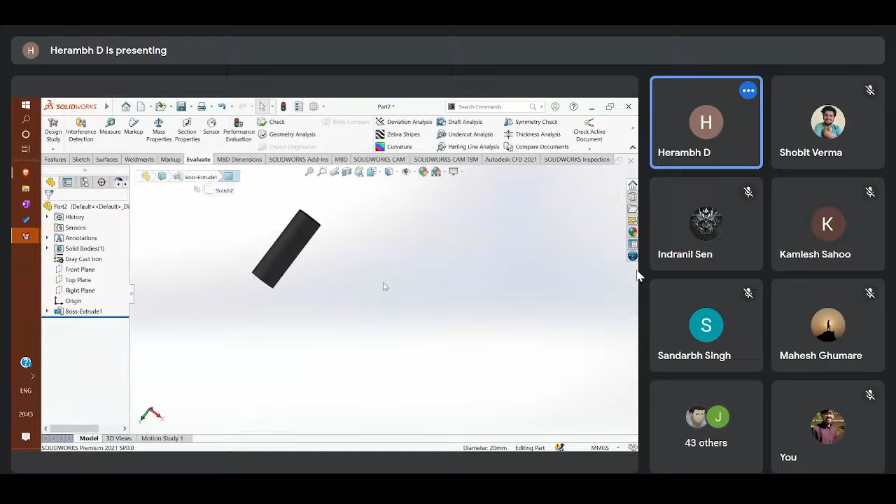You can change the color as well, like the color of the material. You can see that there is a ball over here which is in four different colors. As soon as you pass your cursor over it, it says appearance, scenes, and decals. So when you go to appearances, you can set the color and the texture. In order to select my color, let's say this is what I want - I'll go edit my color. This is the edit option.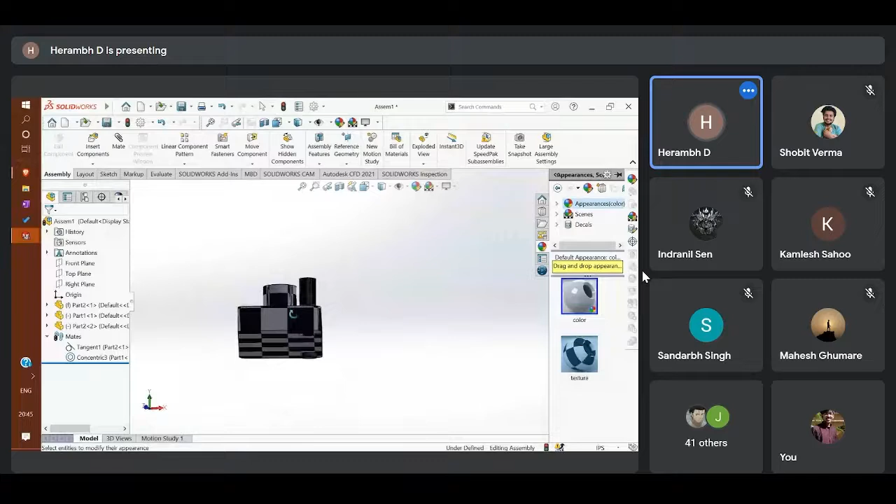I think my library has been deleted, so I don't know. I think that's it.

Does anyone have any question on anything specific? Any questions or anything in specific that you want me to explain to you, other than what was taught to you?

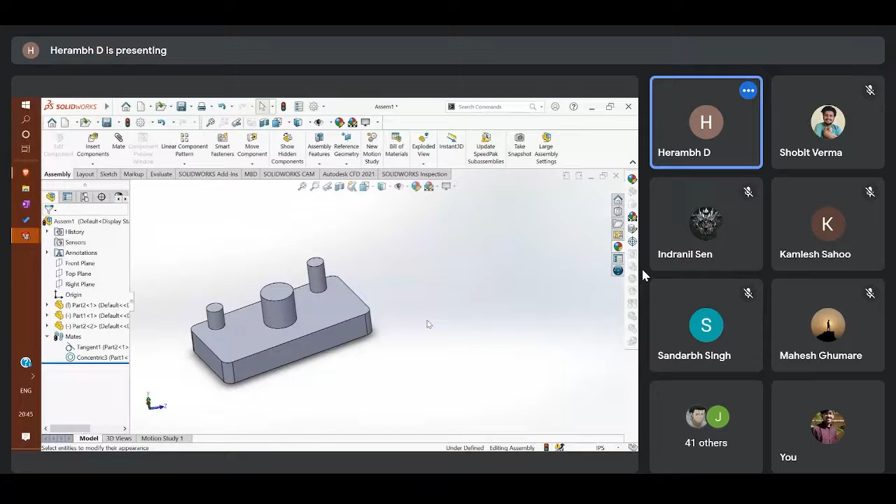So I have one doubt - how did you make one of those parts static and the others moving? I didn't get that part properly.

So actually, what happens is when you're inserting components, I selected this particular cylinder first. Since that was the first part I inserted, that particular part became fixed - it was considered as my reference. In general, I forgot to do that. When you're inserting your components, the first component you insert is the one you want as your base. Ideally, I should have inserted this particular part one as my first component, and then added these two. Then this would have been fixed, and these would be able to move. Since I inserted this particular part first, this became fixed and the others became free to move.

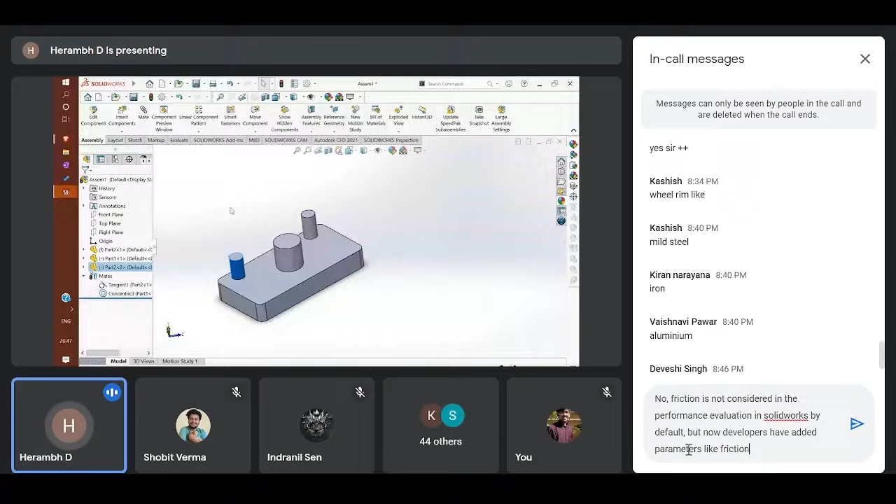I can also change this, but I'll take some time to check and tell you how to change this.

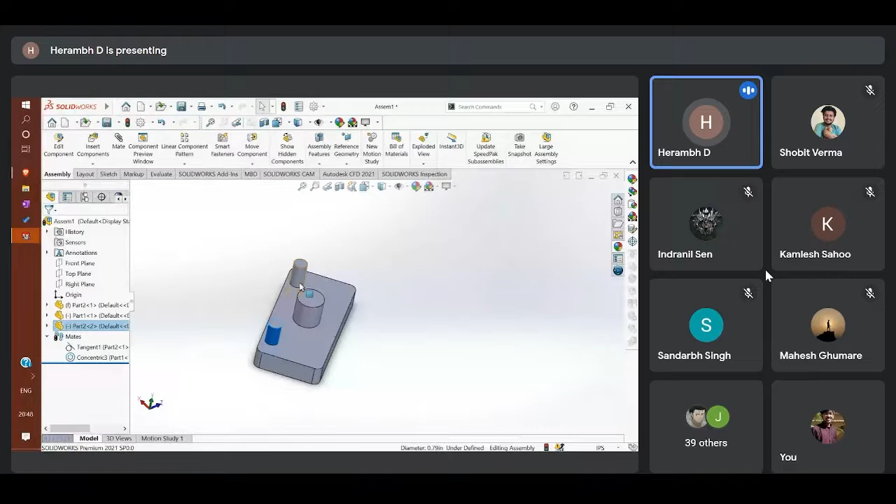Rough, in the sense that on the same part you want to show them separately - is that what you're trying to do? Okay, yeah, so probably different faces. I'll do that, I think that should be possible.

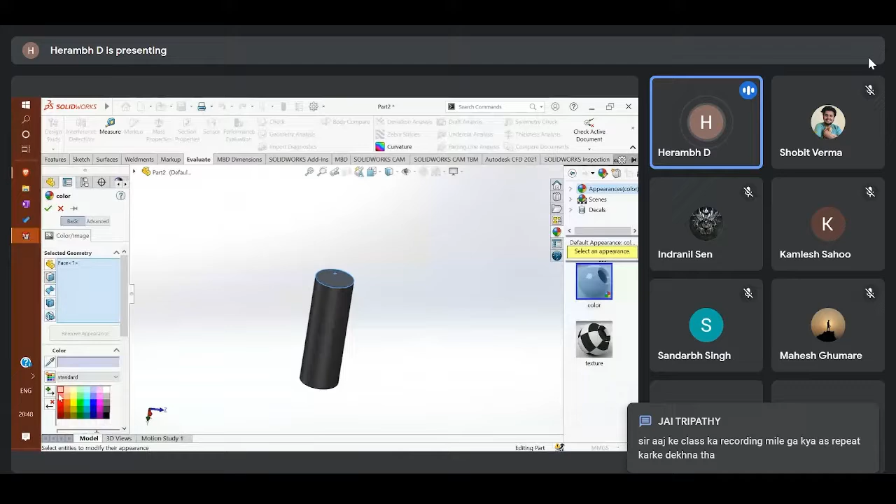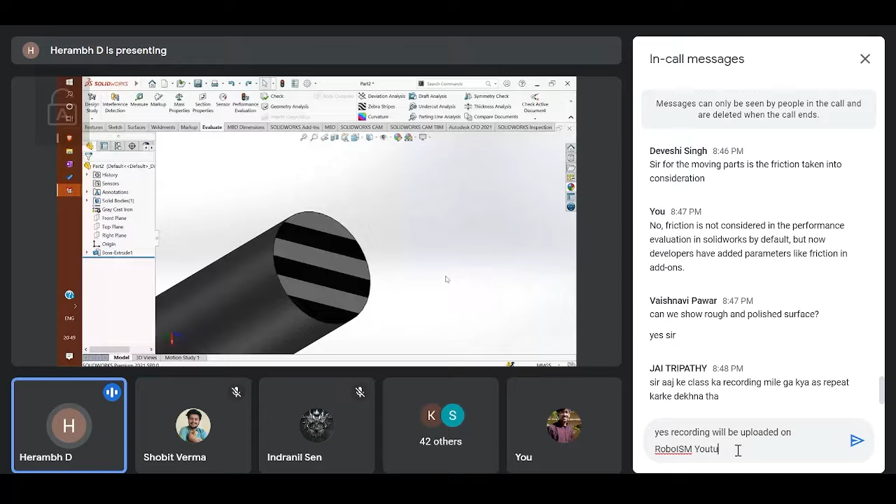Grouping. So here's my color - I'll just show you how I change the color. You can see that this particular face has a different texture, and the one on top has a different texture. So it is possible for you to have two different textures, say one rough and one smooth or something like that.

I don't have those libraries, I think I deleted them. Actually, I think I have it. Okay, rough - I think it's represented in this manner. So this is how my rough is represented. Yeah, you'll have to do this.

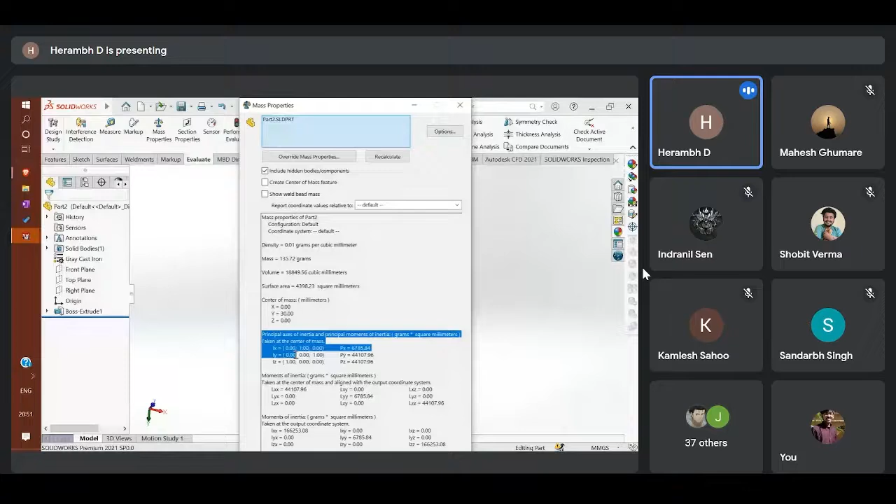Sir, as we have given it properties of metal, so it must have had weight - so can we calculate the moment of inertia using just SolidWorks? Does it have any feature like that? Yeah, yeah, so when I went to mass properties, you can see the moment of inertia - it's showing you the values. These are the principal values, and below you can see the other values.

These are the moment values. Thank you, sir.

And can we specify the axis about which we need a moment of inertia? There are three given axes, but if we have to specify it, yeah, you can. I think this is taken at the center of mass, and this is at the coordinate system over here. You can also recalculate, I think, and select options and use custom settings. Override mass - yeah, here I think you can select your axis.